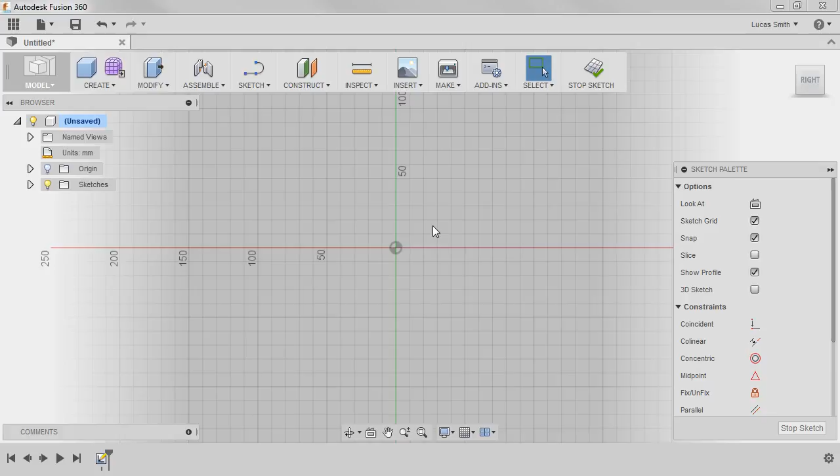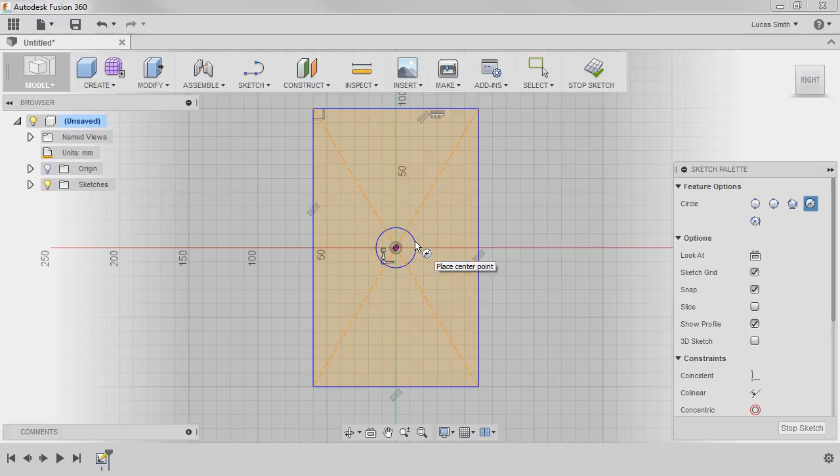I'll begin by sketching the rectangular outer edge of the cover. I'll activate the Center Rectangle command, start the rectangle at the origin, and pull it out to the rough size of the cover. Next, I'll activate the Center Diameter Circle command and, starting again at the origin, sketch a small circle. To create the basic outline of the main cutout, I'll start by making the top cutout and then mirror it. Since I know I'm going to mirror it, I'll sketch a mirror line first.

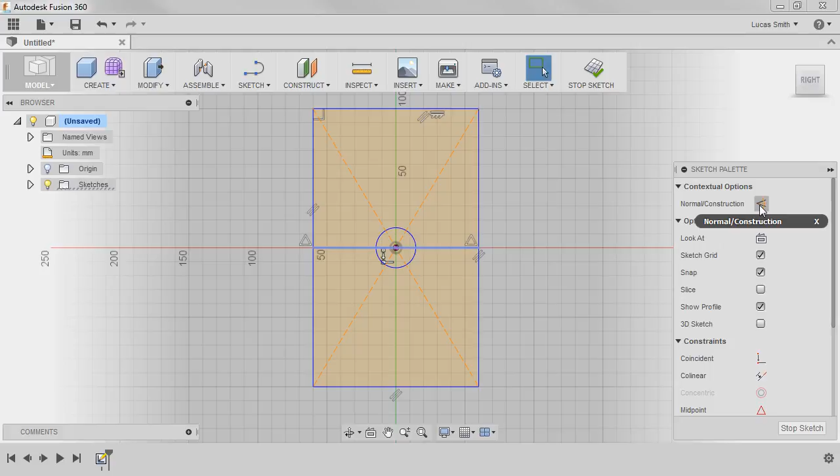I'll activate the Line tool and sketch a line from the midpoint of the left cover edge to the midpoint of the right cover edge. I'll select the line and switch it to construction geometry. With the mirror line in place, I'll start drawing the cutout. I'll activate the 2-point rectangle command and add a rectangle above the circle, roughly centered above the origin.

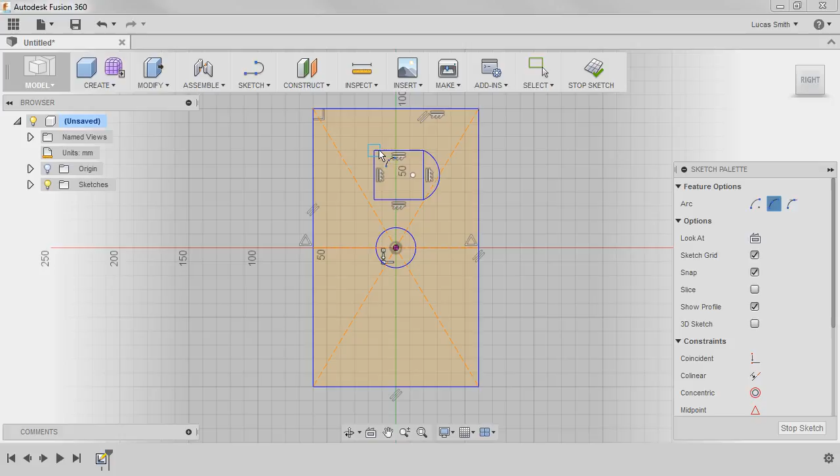Next, I'll use the Arc command to get the curved edges of the cutout. I'll activate the 3-point arc command and add an arc to both the right and left sides of the rectangle. To make the cutout a single entity, I'll make the right and left lines of the rectangle into construction geometry by Control-selecting them, then using the sketch palette to change them to construction geometry.

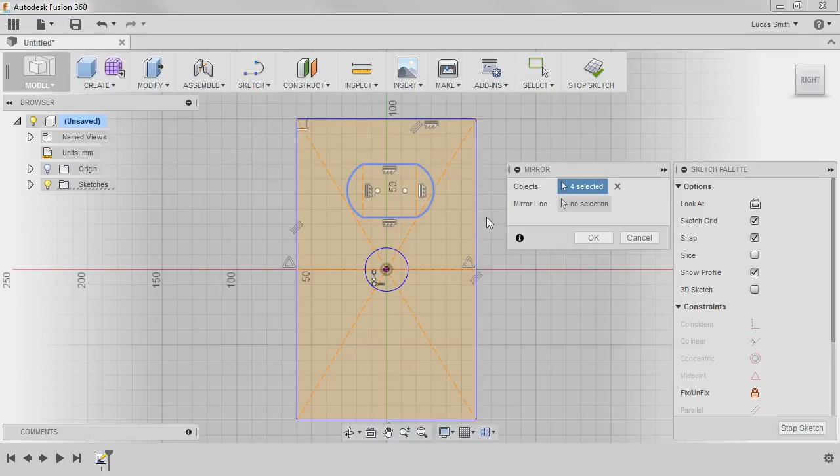The general shape of the cutout is done, so next, I'll mirror it across the mirror line I made earlier. I'll activate the Mirror tool, select only the 4 outer edges of the cutout, and select the horizontal line as the mirror line. I'll click OK. And the general shape of the outlet cover is complete, and I can start adding constraints and dimensions. In this sketch, all the constraints are related to the cutout, so I'll zoom in on it.

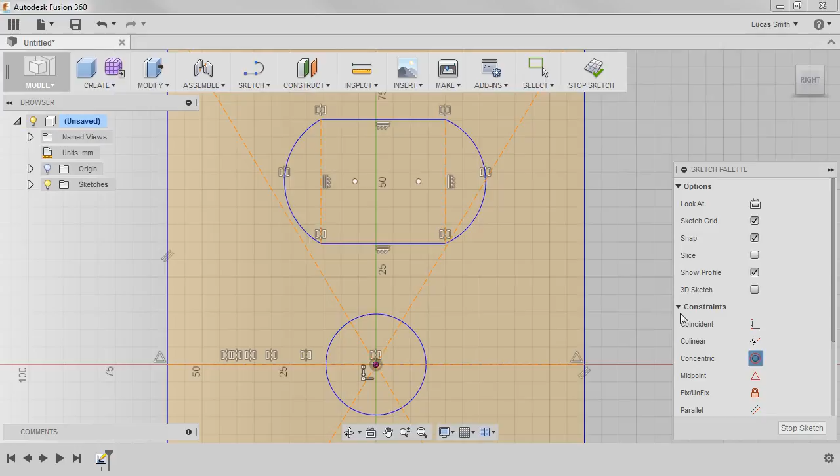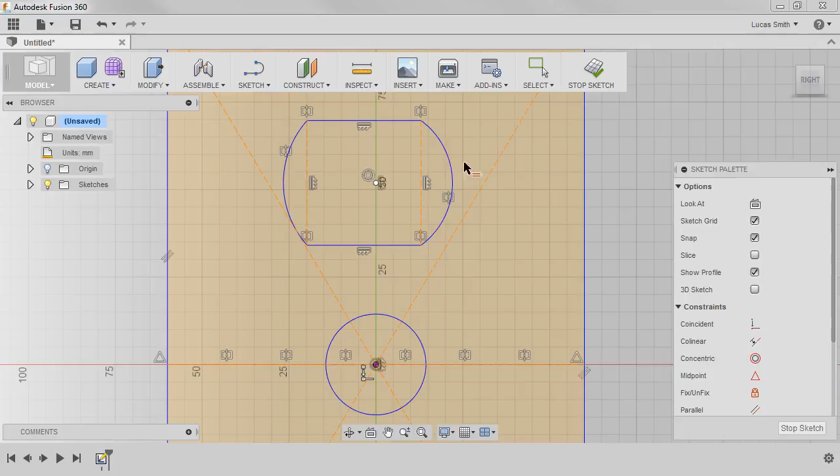I'll start by making the arcs concentric. I'll activate the concentric constraint, then select the 2 arcs. Next, I'll activate the vertical constraint and constrain the concentric center point of the arcs to be vertical from the origin. The final constraint I'll add is an equal constraint. I'll activate the equal constraint and select both arcs. With the constraints in place, I'll finish fully defining the sketch by adding dimensions.

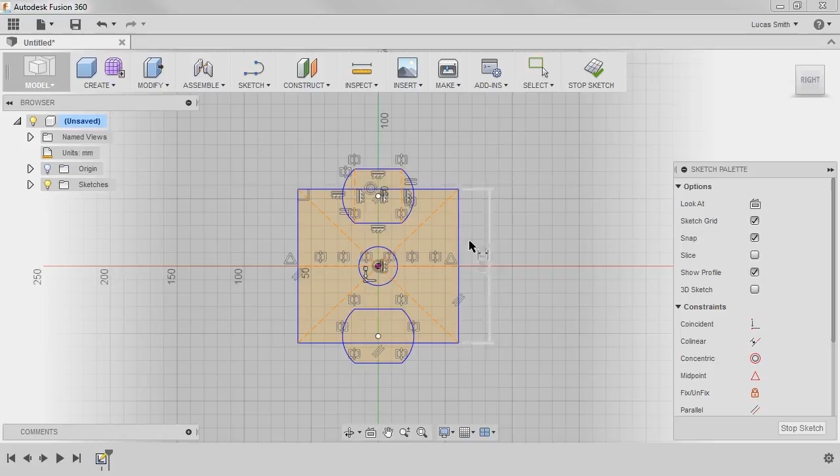I'll activate the Sketch Dimension command and start by adding dimensions to the outer rectangle. I'll select the right edge and set its height to 114 millimeters. Next, I'll select the top edge and set it to 70 millimeters. With the Dimension tool still active, I'll set the diameter of the center screw cutout to 12 millimeters.

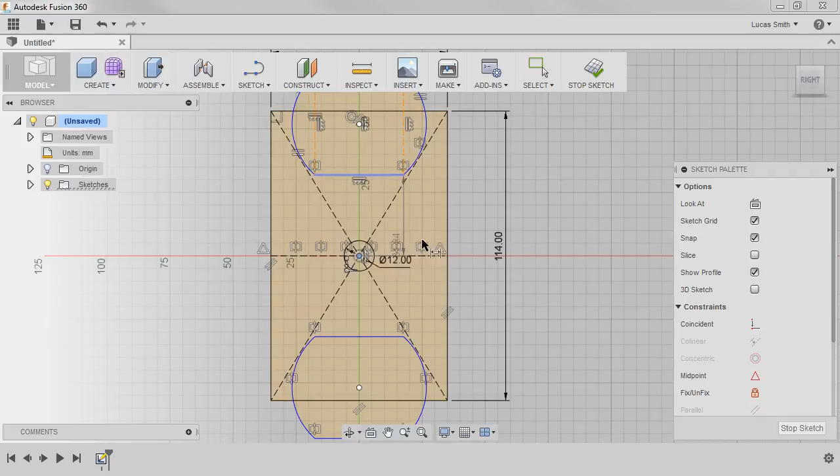Fully defining the cutout will need 3 dimensions, so I'll start by positioning the cutout. I'll select the bottom of the rectangle and the origin and set the distance between them to 11 millimeters. I'll select the top and bottom lines of the cutout and set their distance to 28 millimeters. To finish the sketch, I'll select the right arc and set its radius to 17 millimeters. With that, all of the sketch entities have turned black, and the sketch is fully defined.